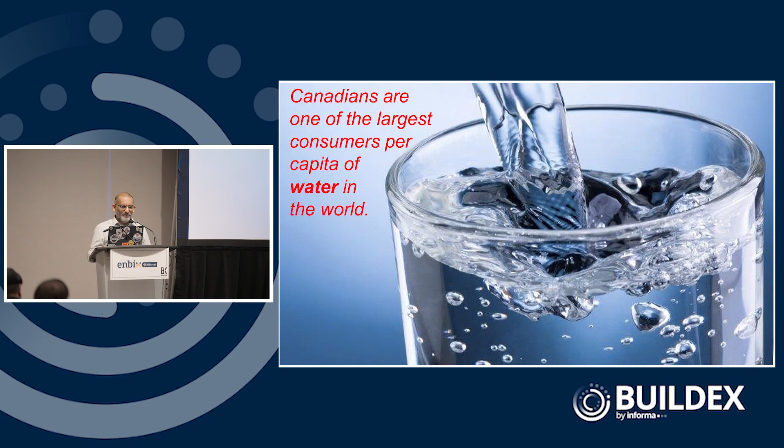So with that cheery note, we also have to recognize we consume a lot of things that produce carbon. Believe it or not, water is a big carbon emitter because all of the energy it takes to purify water, to put it down the pipes and into our taps, is a very big expenditure of energy and therefore carbon. And also the fact that we sometimes cool it, and a lot of times heat it, also influences our carbon emissions, as you can imagine, through mechanical systems.

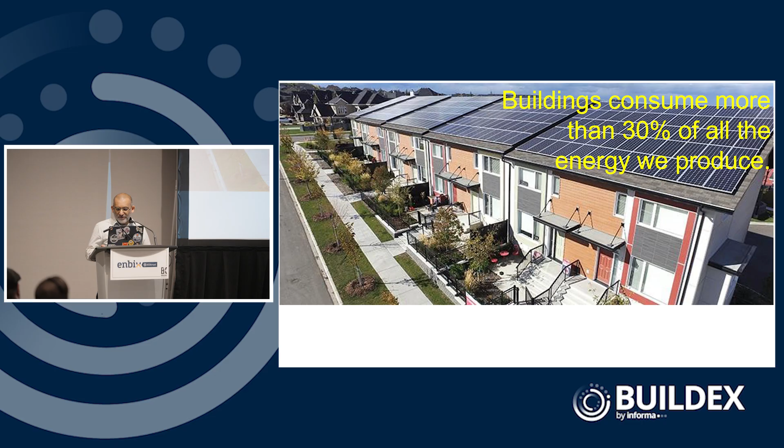As an architect, a third of our carbon emissions are produced by buildings that we design, construct, and build. And of course, if we create those emissions, we use energy. Obviously, if a third of the emissions come from buildings, almost a third of all the energy we produce is consumed by the heating, cooling, ventilation, etc. of buildings out there. So I feel architects, engineers, designers have a huge responsibility to build better, to design better, to figure that out. And that goes for even construction, because half of our landfill waste is from all of the materials we utilize very badly, very inefficiently in the construction of buildings.

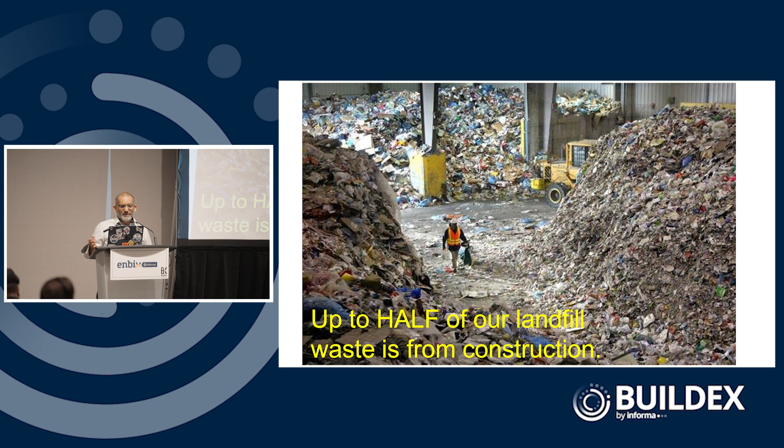I would love to do a whole other session on lean design and construction. There was one earlier today, but that's another passion of mine - how do we, as an industry, think through and build and construct, and therefore hopefully do better in this whole aspect of emissions and carbon. Even the things we choose to build with has a huge influence on that, and that's the gist of my presentation today.

As I said, as an architect, we've finally - I would say only in the last 5 years - really come to terms with the problem we have created. And we are finally, as an industry, trying to do something about it. A lot of that had to be because of regulation. So as many of you probably know, carbon and the former carbon tax we had is because of international agreements we have made, like the Paris Agreement, where we committed to stopping the emission of carbon by a certain date. And Canada is still committed, I believe, to a 2050 zero carbon action plan.

And I have to say it's kind of disappointing, south of the border they're kind of taking the opposite approach. So we are lucky that our governments and our industry are still somewhat taking this seriously, and we still have a lot of work to do, but we'll go from there.

And I'm hoping people, especially the general public, kind of understand the implications if we don't stop emitting. Their insurance rates, I'm sure, are ratcheting up, and therefore there is not just the now defunct carbon tax that is an incentive to do something, but the fact that we have more and more disasters to deal with is going to make carbon quite important to talk about and to deal with and to hopefully solve in due course. So what can we do about carbon?

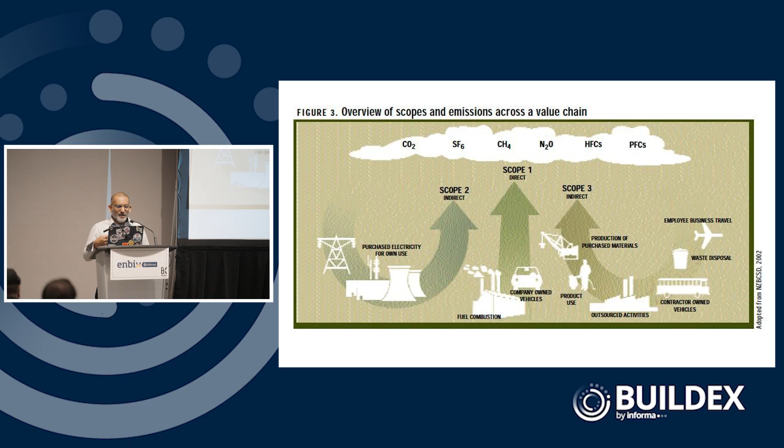We actually combust that natural gas for heating and sometimes cooling, and that creates emissions. Then all of the indirect things we do in our businesses or activities contribute to the scope 3 sort of interrelated emissions through activities we have to do, whether it's the actual construction of buildings or the activities of our particular industries in detail.

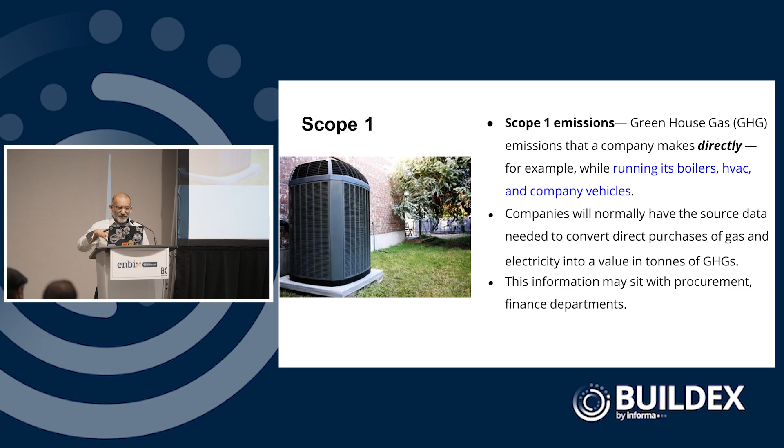So as I mentioned, scope 1 is the direct emissions we create by running boilers, running air handlers, running natural gas furnaces that we are producing probably at the place of our business. Scope 2 is that indirect emission when we purchase electricity that comes down the wires, or if we are buying energy for heating and cooling, or having a district energy system generally producing that.

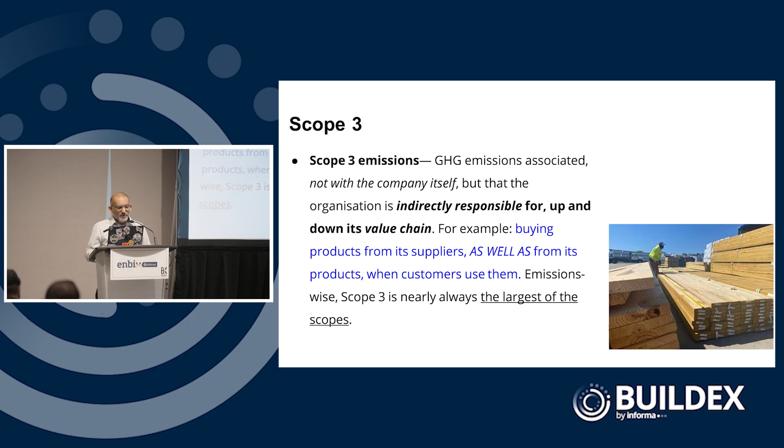And scope 3 is all that indirectly related types of emissions that come from the products we create or the work that we do. Getting to carbon neutral is trying to really understand how all of those work in our activities, and how we can start to decarbonize, or look at how we can fuel switch or transition to sources that don't create those types of emissions.

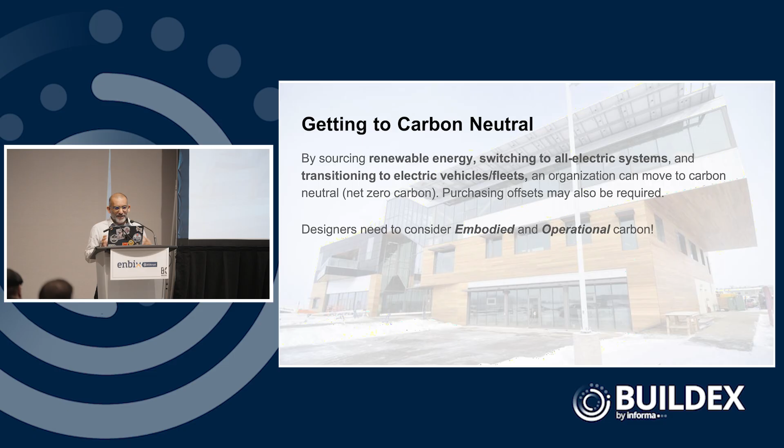We've been mostly in the building industry focused on operational carbon for a very long time. Again, recently we've shifted that conversation to talk about embodied carbon. That is, as you'll see in a minute, a very big focus of how energy efficiency has helped shift that around. So how does it all affect our industry in particular?

As I mentioned, we wanted to reduce the amount of energy we consumed in buildings by trying to find energy conservation measures. We went to LED lighting. We went to high efficiency furnaces and boilers. We did pretty much all the low-hanging fruit.

So basically, we tackled a lot of that operational carbon emitted by the ongoing utilization of buildings, but now we're shifting to embodied carbon, and really it's helping us understand how we have to think of designing and constructing buildings differently through the material choices we make — everything from structure to mechanical systems to even the finished products.

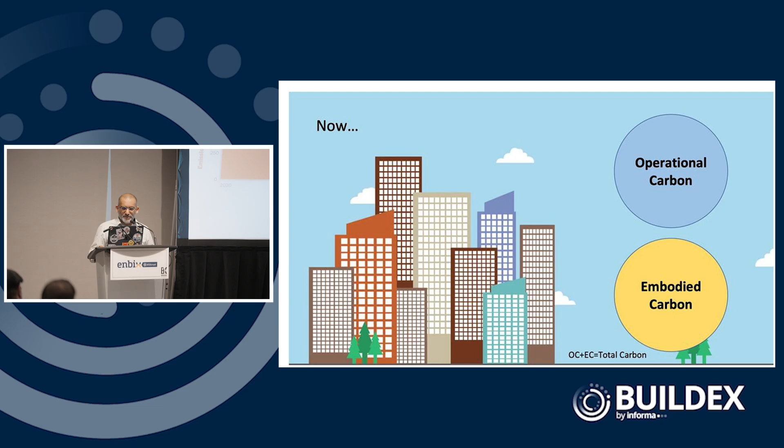Some of you probably know that we get some of that information through EPDs, environmental product declarations. But that, I think, is the journey we're on, is making that switch to embodied carbon. As you can see from Architecture 2030, between 2020 and 2050, the whole embodied carbon aspect of our construction will shift to almost 50-50 between operational and embodied carbon. And that's, again, because we have helped the energy efficiency equation reduce the operational carbon aspect.

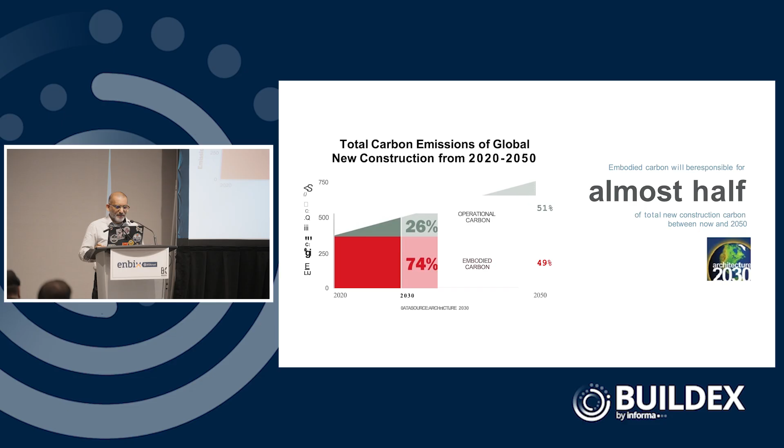So where do we see embodied carbon? Everything from the extraction of the raw materials to the production and transportation of those materials and products, to the transportation to a construction site, the construction itself, and then the actual building through all of its embodied materials, and then also through the life cycle of that building.

So we have this embodied carbon until we demolish that building, and even when we haul away all that material or we landfill it, it's still encapsulating an aspect of carbon. So when we talk about how we reduce the whole life cycle of carbon in a building, we're actually looking at the whole entire start to finish.

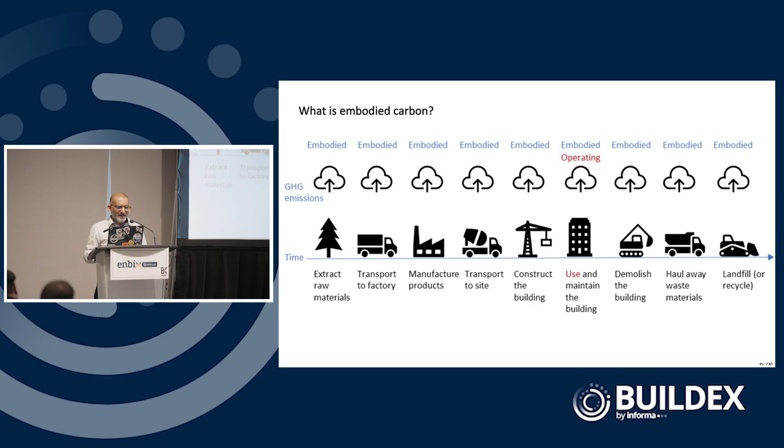And this now relates to how we're trying to think about circular economies, and how instead of landfilling or demolishing, we need to reuse materials or retrofit or upcycle, to really try to take away some of that end-of-life carbon aspect.

So what we do in the design world at the start is we look at that whole building life cycle assessment. We look at how all of those materials relate to mostly structure and mostly things that we identify right now as very big carbon challenges — so that is concrete, steel, and aluminum.

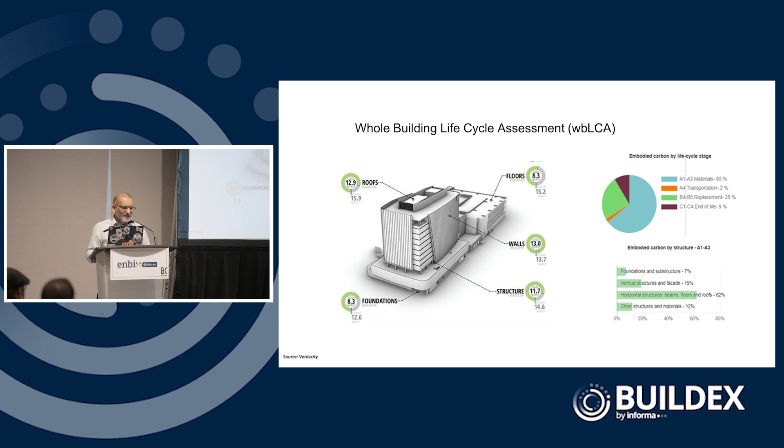What we're beginning to also really consider is mechanical equipment and the refrigerants that sometimes cause a bit of a problem when we let those refrigerants escape into the atmosphere. There are several tools that we utilize.

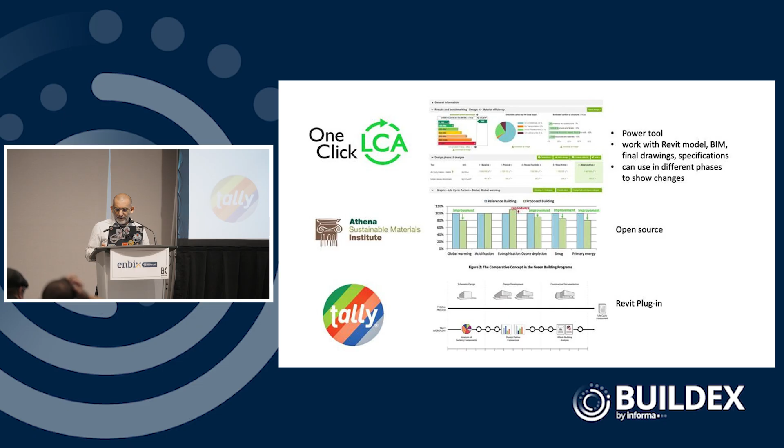Probably a bunch of you have used One-Click LCA or know about the Athena Institute, who helped from the very start map out how to calculate carbon in our materials. When you begin to really recognize where materials have carbon, both operational versus embodied carbon, you begin to see how big of a challenge this can be.

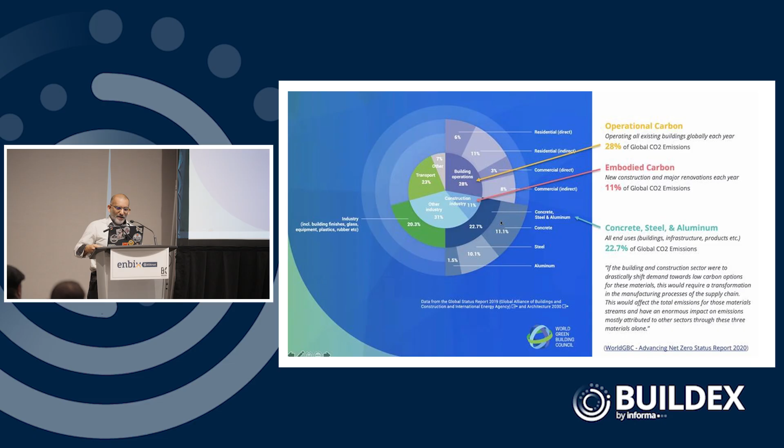In the last decade, we've recognized that we need to consider alternatives like wood construction for tall buildings. So much of the tall wood structures are because we are shifting away from the idea that we have to build tall structures out of steel or concrete. The wood fiber itself encapsulates or sequesters that carbon, and therefore is a carbon positive material we have to work with, rather than a very high intensive carbon emitting material like concrete or steel, which frankly have magnitudes more carbon challenges than wood itself.

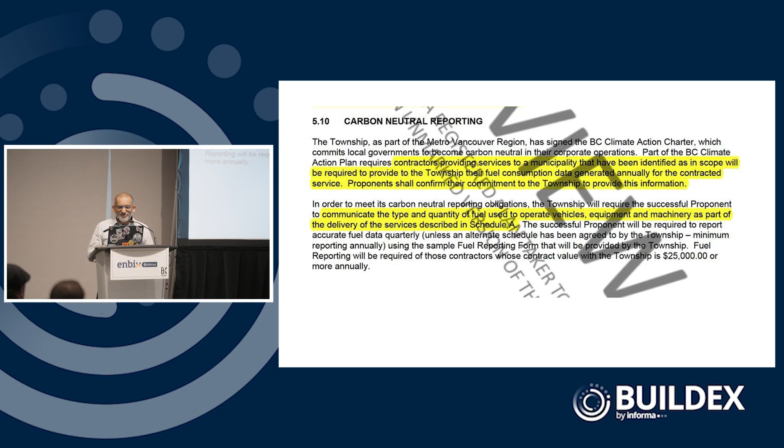We are also seeing, because of good policy and good regulation—and I know in Alberta regulation is kind of a four-letter word—certain places actually require us to identify the carbon emissions or quantities in their calls for proposals. This is out of the township of Langley in BC. They particularly wanted in that RFP call, for consultants who want to build in that community, you need to show us your carbon reporting for your work. I think we're a little bit behind in Alberta to reflect on that, but it will probably eventually catch up with us.

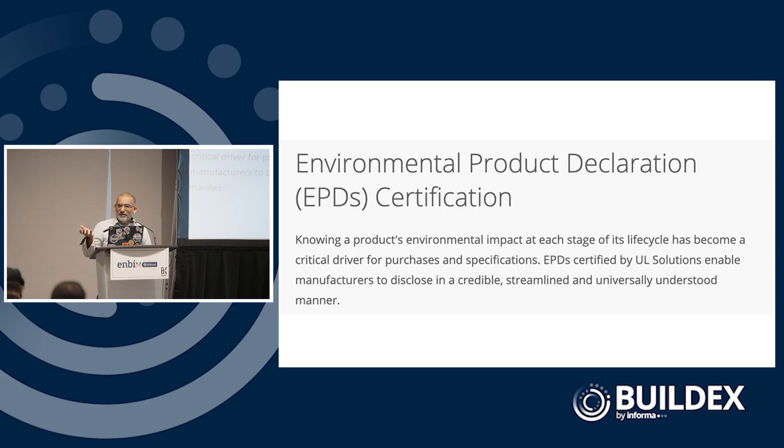As I mentioned earlier, environmental product declarations are a really good tool that is vetted by a third party to help us understand the material's carbon impact as well as other aspects in their use. I would highly recommend that we all start asking our suppliers, do you have an EPD on the carpet or the ceiling tile or even wall coverings, and begin to make that part of our process in design and specifications.

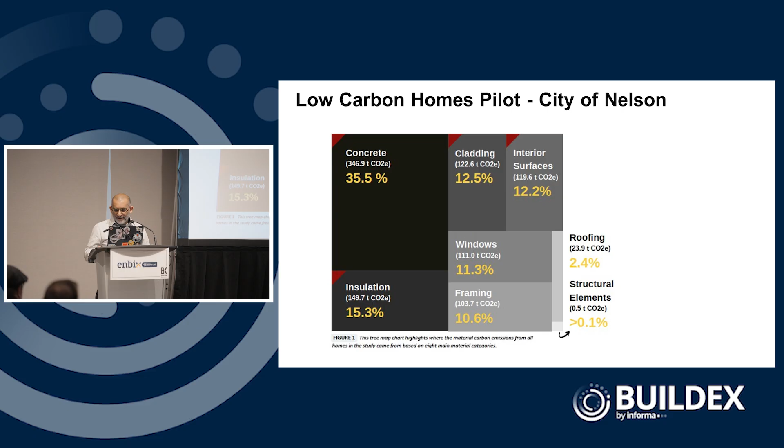Most of housing is still built out of wood construction, but it's those darn basements we build. That's going to be an interesting challenge as we try to find alternatives, like glue laminated timber foundation walls, which I hear are being piloted. Or I saw yesterday in a presentation sort of an encapsulated steel with styrofoam type of foundation wall created by Polycore. So we are beginning to help solve this problem in carbon and the challenges we see, and try to look even further.

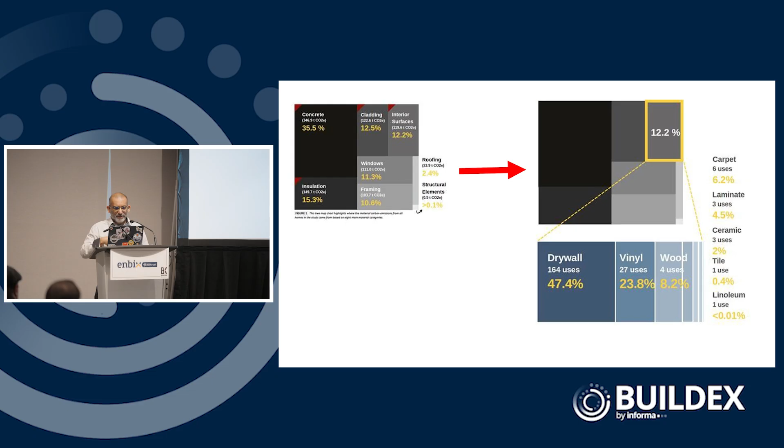All of these materials have some aspect that we can do better on. So drywall, vinyl, carpet, even tile—we start to have to question, can we find things as local as possible? Because sometimes the biggest carbon aspect of a material is in the transportation from afar, or from the raw extraction to the production, that whole chain of life cycle that it incorporates.

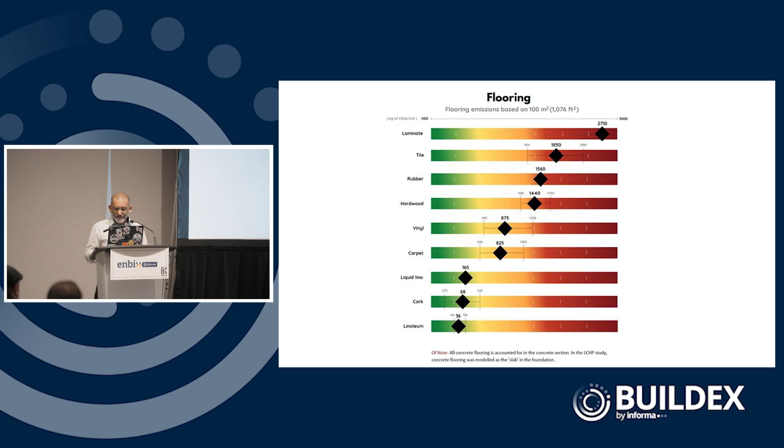For example, if we think of flooring in housing, we tried to look at the emissions of each material, and it's almost kind of obvious—the more natural a material is, the better it is for the environment. If you see here, laminates and tile are on the top end of emissions, versus natural linoleum or cork, which is actually much lower. That said, I don't believe we produce cork in Canada, so we have to look at where it's coming from to say, okay, even though the actual production of that material is low, how does it all stack up at the end of the day?

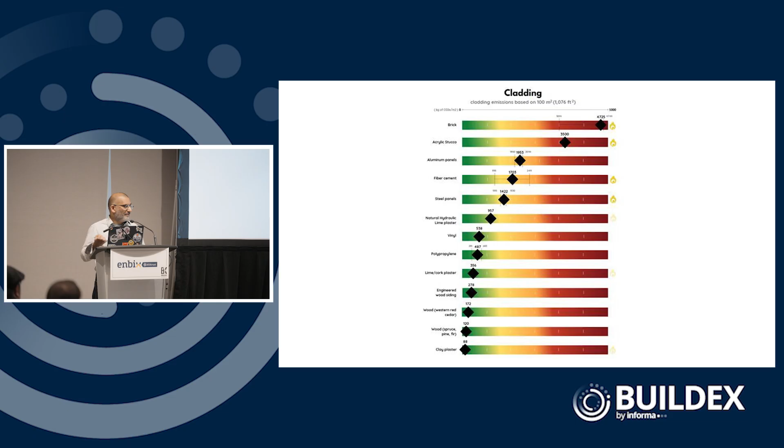Same with cladding. If we look at the different options we have, we definitely want to start to look at, is there things that don't require a ton of carbon emissions in their creation, like clay plaster, or wood, or hopefully even hybrid cement fiber materials, versus things that generally require big kilns or big furnaces like brick and aluminum or steel panels. They're surely the most carbon intensive we have to deal with.

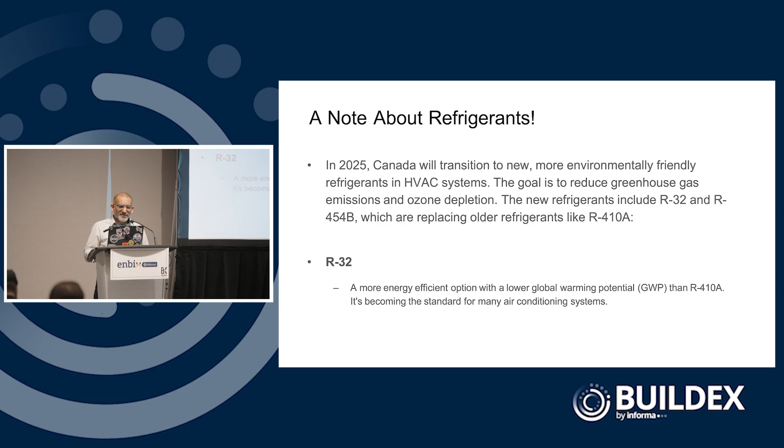I wanted to mention again, back to mechanical systems, I was curious if any of you run into challenges with refrigerants in speccing mechanical systems. A project we did, a net zero commercial building using VRF mechanical systems, now needs to think about what type of refrigerants it can utilize going forward, because refrigerants are now being regulated to be less of the type that creates high global warming potential. So even though we create better, more efficient mechanical systems using variable refrigerant flow and heat pumps, it's really tricky to get the right installers to produce these systems without creating challenges when something leaks. This will be an interesting thought for the next little while.

I'll go through a quick impact of materials through the International Olympic Committee, who were looking at materials, particularly signage, and how wayfinding, signage, and branding has that impact as well.

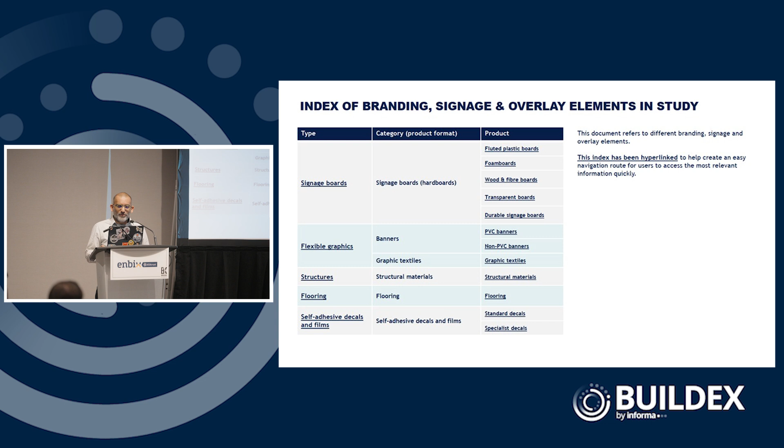They basically followed a European standard of considering embodied carbon and operational carbon in looking at all the things they have to put up for temporary events: signage boards, graphics, electronic signs, flooring, self-adhesive stickers and decals. All have an impact and a material quality they wanted to be smarter about. Much like a building, they went through a process of how to design something that thinks through the building life cycle, where it's manufactured, supplied, and even printed.

They found that the inks used to print signage are challenging because many have chemicals that not only off-gas but create human health hazards. And then what to do with all the signage at the end of the Olympics when it becomes defunct or unnecessary? Instead of landfilling it, is there a way to upcycle it or put it back into a value stream of some sort?

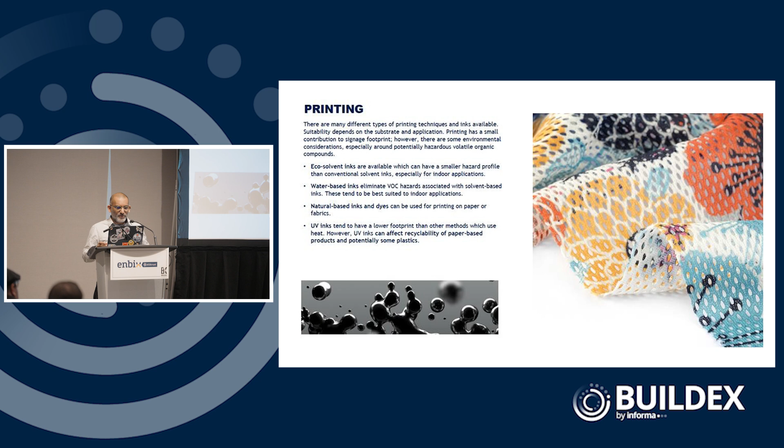So they looked at how the printing process can take more water-based solutions or solvents that are far more friendly and don't create dioxins in production, but are also UV resistant. One thing we sometimes think about, but not often enough, even in building materials like carpets and wall coverings, is flame retardants, and the same applies to signage.

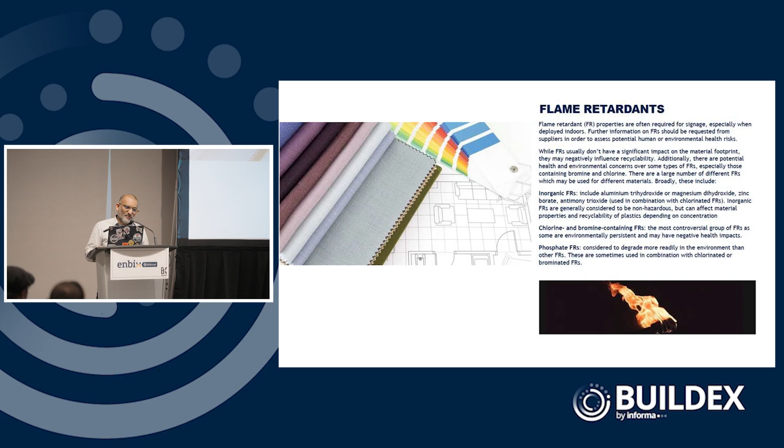They started to study how flame retardants are very problematic. Many of them have bromine, chlorine, and other toxic chemicals in their production, and they're forever chemicals, meaning they'll be around in the ecosystem and water cycle indefinitely if we're not smarter about these types of things.

And I can't present without going into PVC and the challenges of polyvinyl chloride. For a long time, especially in the building world, we've known about the off-gassing of PVC, its very challenging production, and the inability to actually recycle PVC as a plastic. So as specifiers, we try not to utilize PVC as best we can, because not only is the carbon impact challenging, but in many jurisdictions, especially in Europe, it's now becoming a banned material because of the processes involved in creating it.

So on one hand we look at using laminate flooring, but on the other hand, is it made out of PVC? If so, use linoleum instead.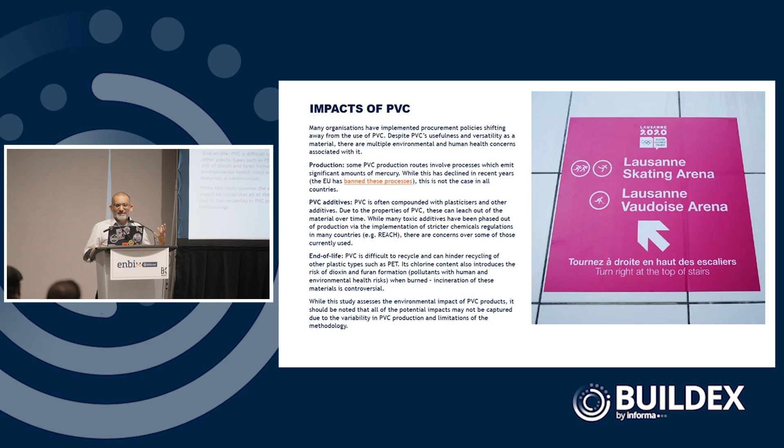With the Olympic signage study, they began to really say, why don't we actually use digital signs rather than print stuff? In certain cases, this will solve a lot of the challenges in visual wayfinding and things that don't need to be thrown away at the end of their life. There's lots of work to be done in how we look at alternatives and think differently about the products we choose.

Switching gears back to buildings and building construction, we were very fortunate to work with the Canadian Wood Council on a project that helps architects and engineers reconsider the materials for structure and envelope for very common commercial buildings.

So we were asked to not look at CLT or glulam, but look at actual dimensional lumber as solutions for a couple of very common building types, for example large warehouse buildings that have an office component. So the top two slides are this idea of how do we construct these very large manufacturing or industrial bays that build trusses out of 2x6s or 2x8s of dimensional lumber rather than having to get glulam beams and columns.

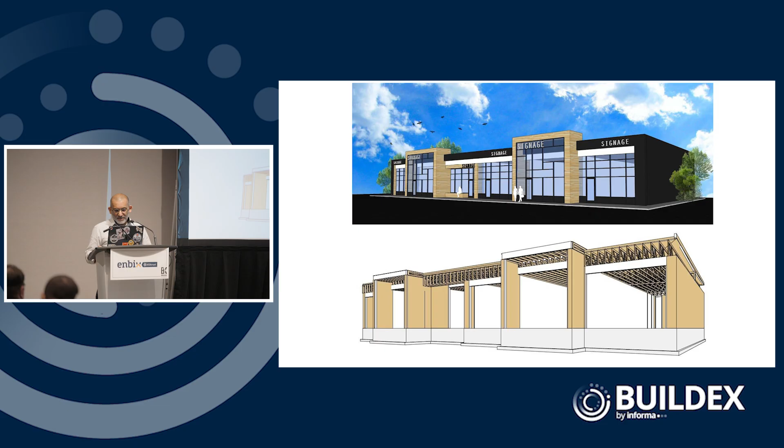So I think the fun part of being a designer working with low carbon materials is trying to push the boundaries of materials we know are out there and what we can utilize to really help solve that challenge.

This is going to be sort of the last project I want to share with you. It's a couple of fire halls we're developing with 5468796 Architecture out of Winnipeg for the city of Edmonton. This is where we were able to help guide the material selection due to that life cycle analysis of where things were.

And having practiced in architecture a while, we were trying to just encourage a lot of different ideas, but also testing how far we can really push simple materials and simple forms to do something spectacular.

Generally, I think as designers we want to be more expressive, but there is a simple elegance to materials as well that also means we can be smarter about carbon. The less complex and layered the materials are in a building envelope or design, the better off it typically is, because the less waste it creates, or the simpler the connections are, the easier it is to deconstruct or disassemble those materials and reuse them again.

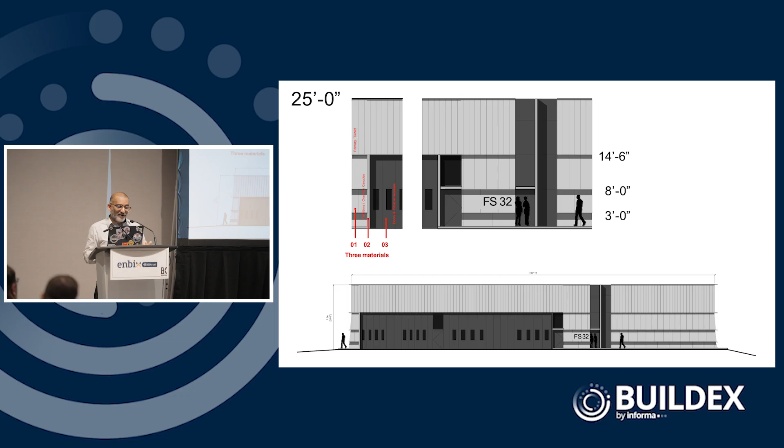And so we were trying to help the design team really understand and choose the right type of materials based on how they are detailed, how they are shipped, how they are basically even put together. So again, here you see we avoid creating different notches or articulation in buildings that make a lot of cutting and a lot of junctions, and therefore challenges in those transitions.

How do we find materials that are robust but also durable and cost effective? Brick, unfortunately, was something we were trying to dissuade them from, but frankly there's a lot of existing fire halls in Edmonton that have used masonry, so the end users were pushing for something a little more traditional.

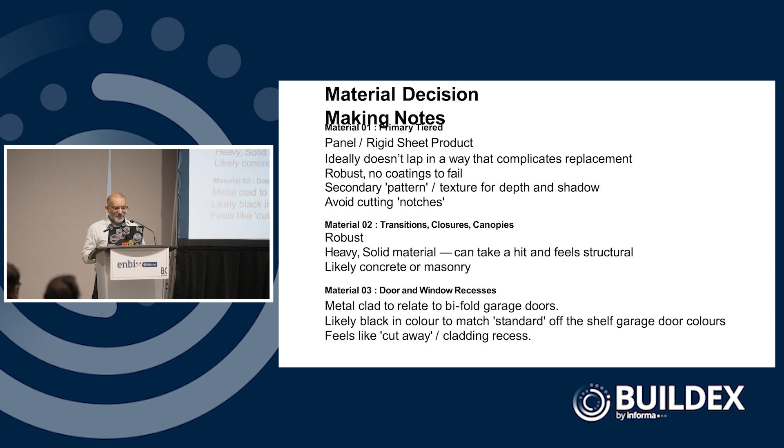There are very few solutions for overhead doors for fire halls, so how do we start to look at the relationship between metal and other materials that can work to our advantage? Here are some renders where we tried different aspects, colors, and textures to test that out. And then the architects kind of went awry and started to get interested in corrugated metal materials or things that would add that texture.

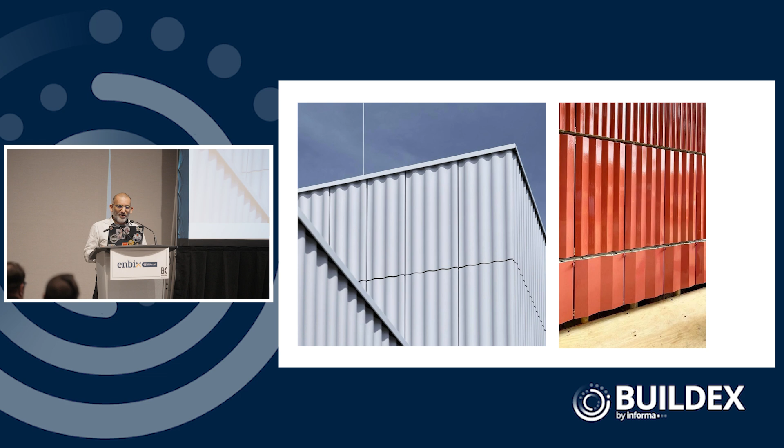So again, we helped understand, okay, if we're going to source materials, where is it produced and how can we be effective in its assembly? So don't go to Europe to get all of this fish scale-like material, even though it's durable, lightweight, and malleable, because it's wildly cost ineffective and also has durability issues, including how it can dent. We did a presentation yesterday on climate risk, and we're reminding architects, engineers, and even our end users that the hail we will have in our region is going to damage buildings more and more as we get more extreme events happening.

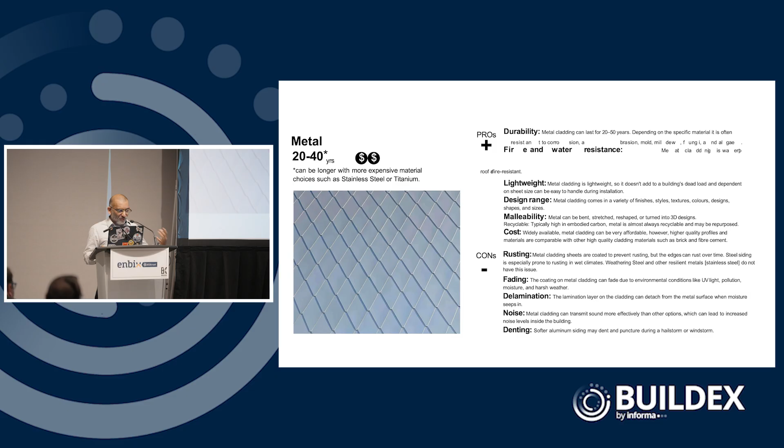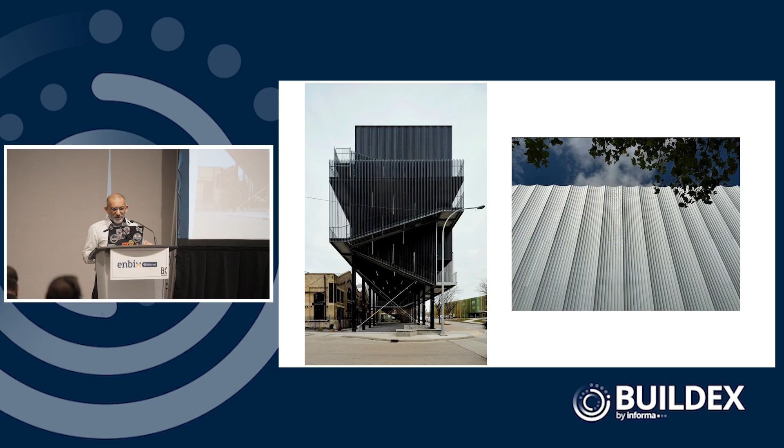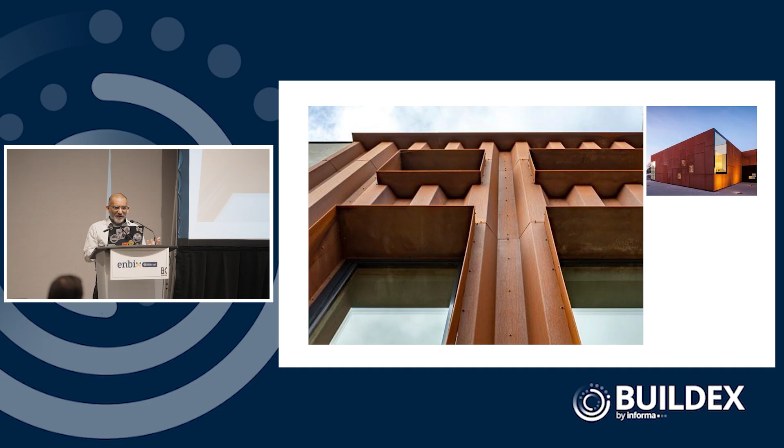So how do we start to make these robust? The corrugations and the type of material can actually create the rigidity and avoid issues if we're smart about it, or if we're going to select steel as a building material, that gauge of steel has to be very carefully determined. Again, steel is a high embodied carbon material.

And then they got ridiculous, asking if we can use expanded aluminum or this. It's like, no, you're not using that aluminum, it's way too carbon intensive in terms of that type of thing. So we have to start to restrain ourselves a little bit, but also be flexible, I guess.

As we all know, everything in moderation is probably the best solution. And essentially, what we're trying to do right now is look at fiber cement or things that are locally available, good for our environment, but also suited to our climate and the particular challenges we'll see in the near future.

So essentially, how we think through these materials is a team effort, working with our life cycle analysis. We used One Click LCA to do all of the embodied carbon accounting, and presented a lot of the analysis of how they can start to pair them together and be hopefully smarter and more effective with that.

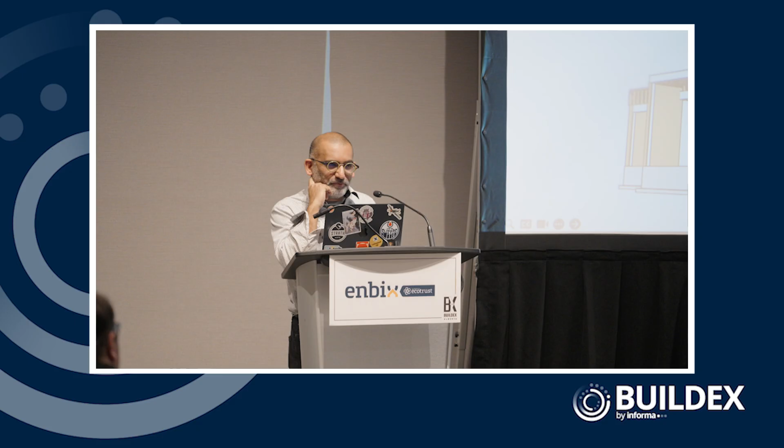Is that the 2030 code that's going to address embodied carbon? The code is changing. Right now we're trying to get the step code for energy in place, and eventually that energy will also relate to carbon. By 2050, our country needs to figure out how to become zero carbon in all we do. So I would hope so. And again, building codes, frankly, take a very long time to get their act together.